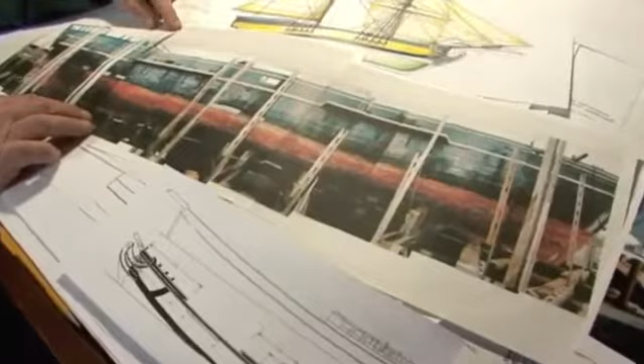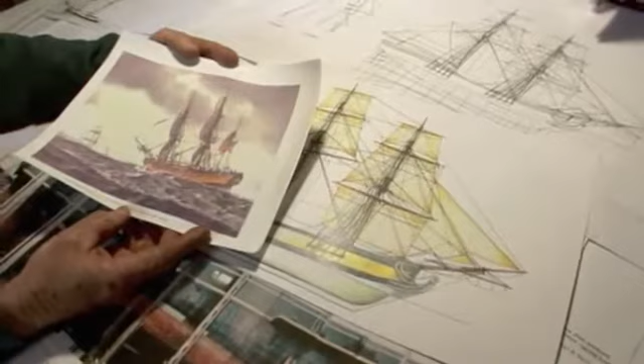This is the Beaver when she was at the pier in Boston before we brought her up to Gloucester. And as you can see here, the vessel is in sore need of a lot of repair work. And this also gave us the opportunity to make some alterations and make her much more historically correct. This is what the Beaver will look like when she's finished. This is based on a vessel called the Columbia. And the Columbia was well documented because she was the first vessel to carry the American flag around the world after the Revolution. So she was well documented in her logbooks and in paintings of that time.

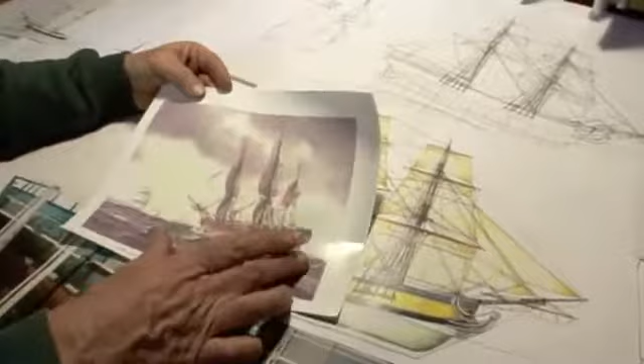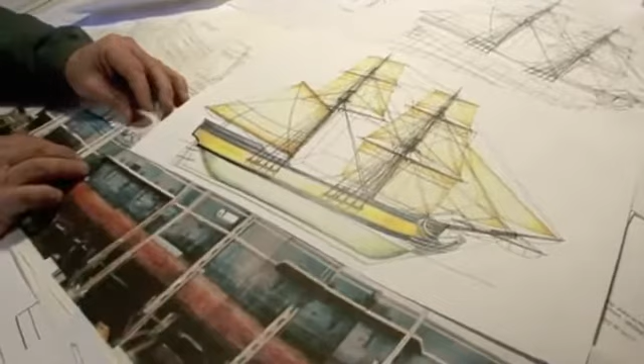From this also we learned that the sides of the vessels of that period were generally a bright yellow. And the reason for that was they wanted these vessels to appear to be a new vessel, even if they were old. An old black vessel meant that she was slow and would be an easy prize for a pirate ship or a privateer.

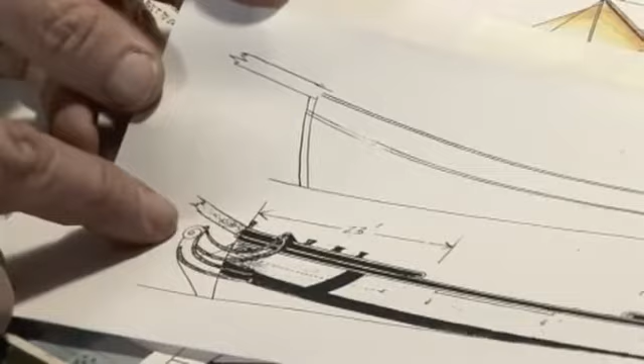One of the significant changes that we're making to the Beaver is we're changing the way her bow looked. She previously had a round bow like this. We're going to change it to a full head rig, complete with headrails and a billet head. The Quakers usually decorated their vessels with a billet head instead of a figurehead because they wanted to be less ostentatious. And here's the billet head. This will be very similar to the billet head that we'll carve for the Beaver.

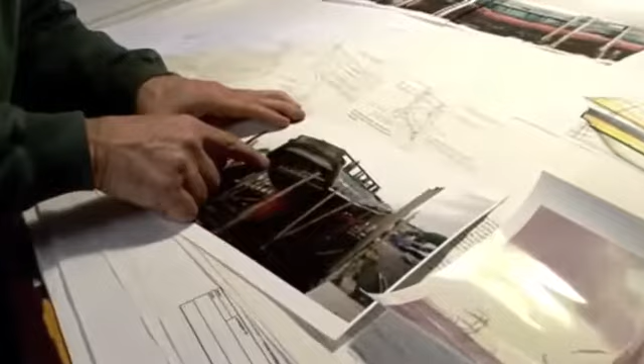Before we go down and catch up with Rob on what he's been doing on the stern of the Beaver, I'd like to explain why we're making these changes. The Beaver, when she first came from Boston, looked like this. The bottom part of her stern was way over carved, and underneath here had never been finished. What we're using for our model is the Columbia, because she was built in the same river as the Beaver, less than a year apart. And as you can see from her stern, it's a much more simplified stern and has some round timbers. Okay, so let's leave the drawing board for now and we'll go out in the yard and see what the guys have been up to.

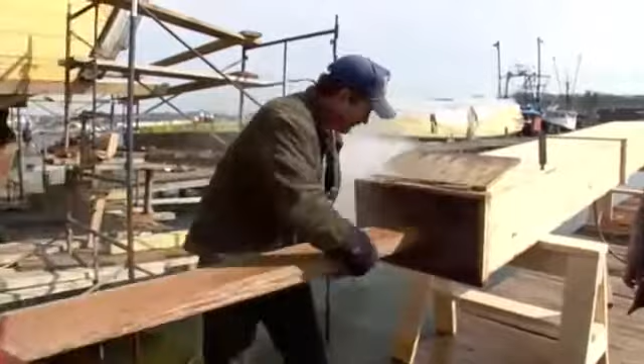I'm Ed Wayman. I'm from Colorado. I've been building boats for probably 30 years. I built steel hulls down in the south, and I came up here, started as a foreman here at this yard, and been taking care of these two wood hulls for about the last 2 years, and they needed some help with the woodwork, and so I hired on as their helper here. I'm Rob Stevens, and I've been working on the Beaver here. I've been working on converting the 1902 stern to look like a 1770 stern. Hi, I'm John Gardner. I'm working here on the Beaver. I'm a boat builder and currently working on the planking.

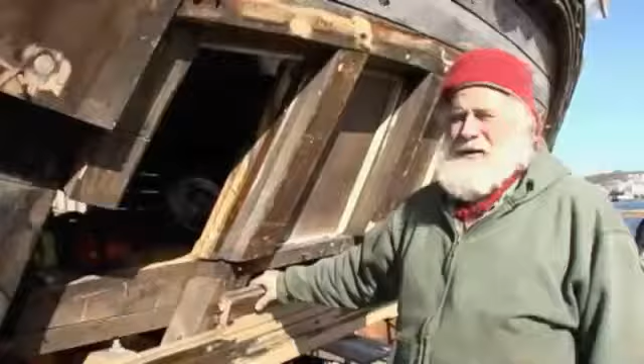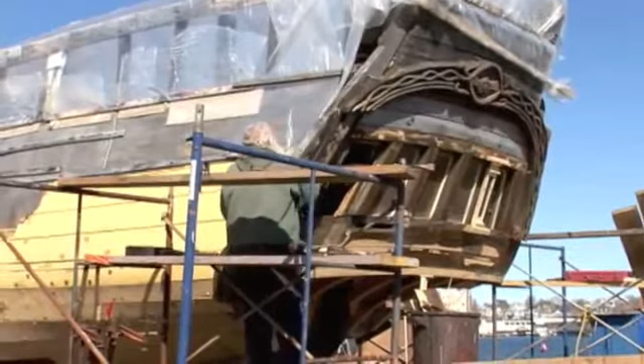On the drawing board there, we looked at some of the modifications that we're doing to the Beaver to make her more authentic. As you can see, we've been doing some work here this last week. We've got some more planks here on the port side, and Rob is continuing with the work on the transom itself there. Well, what we're working on is converting the stern to a 1770 stern, and while in the process of changing the trim around and getting it more correct, we discovered this corner post here is rotted. It's behind here, and so basically now's the time to deal with it. Once we have that, basically a lot of the same shape will be going back on, you know, new windowsill, what have you, and then as you can see back here, this is sort of a mock-up of the trim.

Okay, as Rob was explaining, this is a modification that we're making to the Beaver, of course, to make her more authentic. The Beaver, of course, was owned by the Quakers, so the decoration would have been fairly minimal. And we've got the dimensions here worked out. We've got these pieces in place here. And this, of course, would be continued all the way across the stern gallery here. Next week, we'll come back. We're going to be doing some more planking down on this side here. And we should have this area here where Rob has been working on that rot area, we'll have that fairly well closed in.